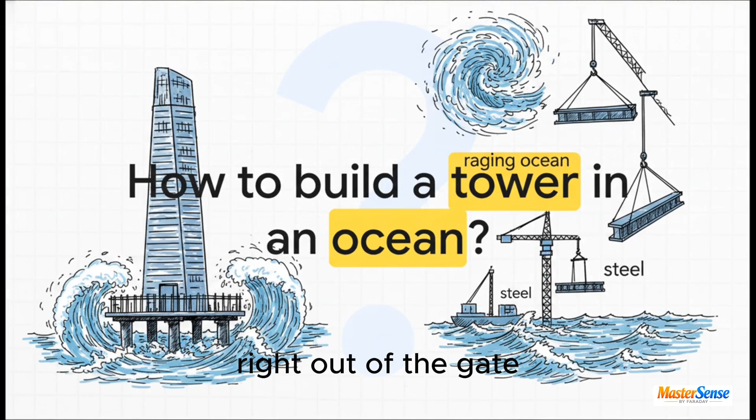Right out of the gate, it raises a really high-stakes question: how do you build a skyscraper in the middle of a raging ocean? Because that's exactly what we're talking about here. The ocean is an unpredictable, constantly moving environment, the ultimate antagonist. Ocean waves can exert thousands of tons of kinetic force per square meter. Engineers literally have to outsmart those raw physics just to safely deploy thousands of tons of steel.

Okay, let's dive into this mission briefing. We're taking a step-by-step journey today. First up, leaving the shore. Then, fixing the foundation. Third, installing the topsides. And finally, mastering those extreme marine risks.

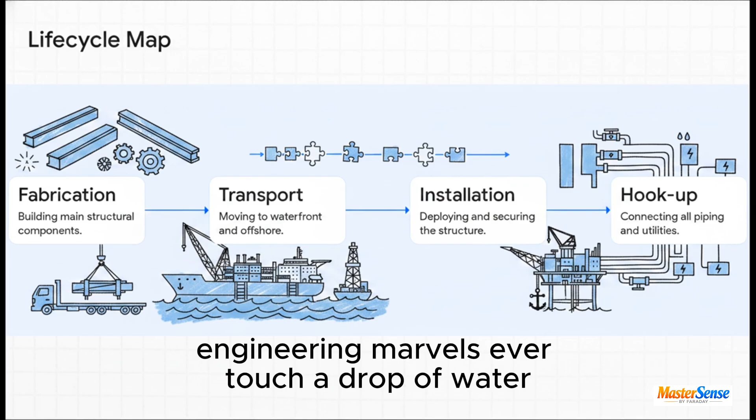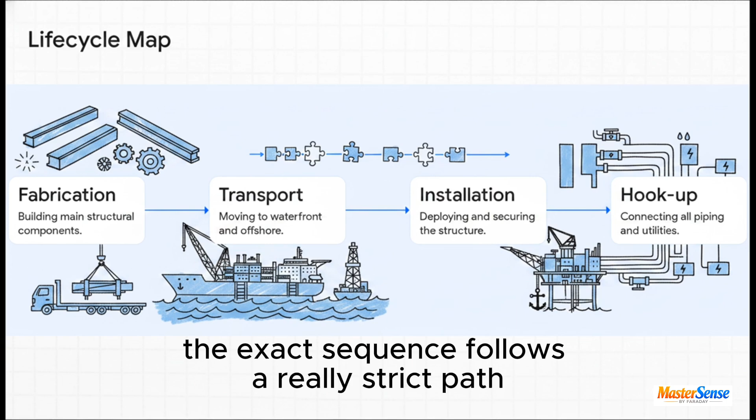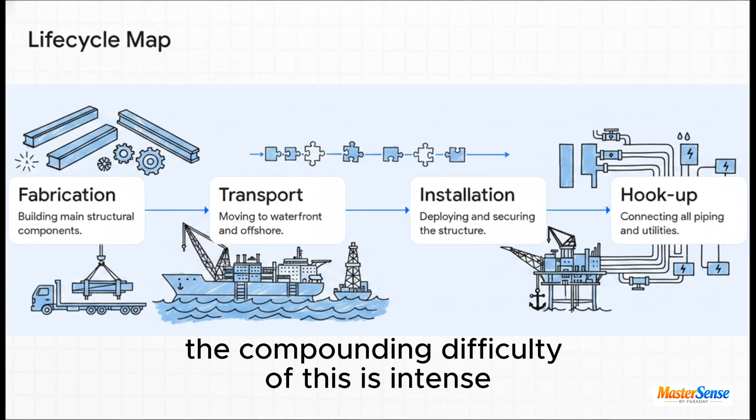Section 1, leaving the shore, the birth of a giant. Before any of these massive engineering marvels ever touch a drop of water, their operational life actually begins on dry land, safely inside these gigantic fabrication yards. The exact sequence follows a really strict path: fabrication, transport, installation, and finally hookup. That might sound like a pretty straightforward, simple progression, but actually the compounding difficulty of this is intense.

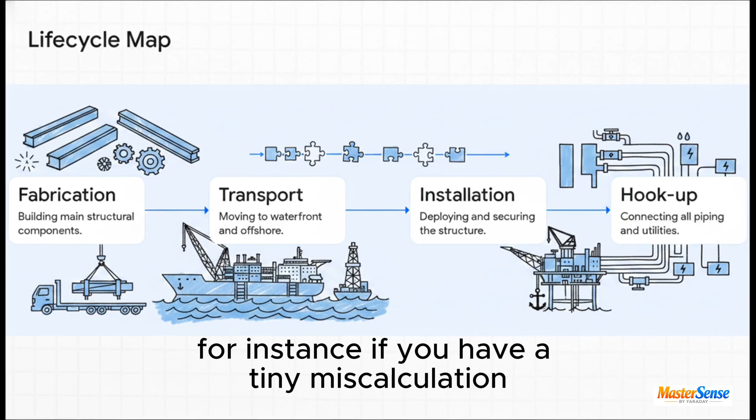It's a domino effect. Every single phase must be executed flawlessly before the next one can even start. For instance, if you have a tiny miscalculation or a delay during the transport phase, it doesn't just mean you arrive a little late. It throws off your meticulously planned marine vessel availability and can completely derail the offshore hookup phase. We're talking delays that cost millions of dollars a single day.

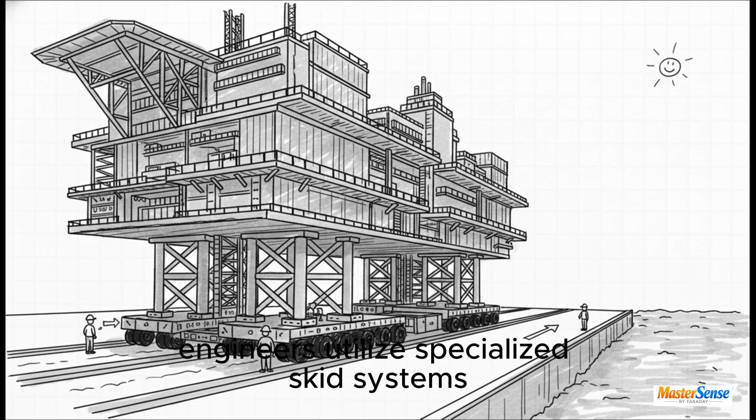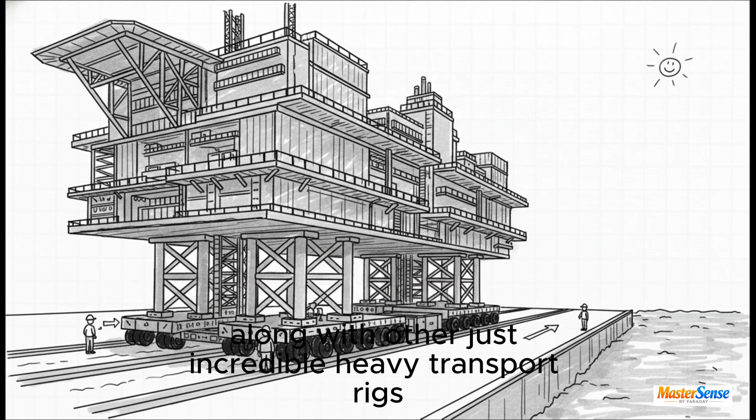Once the fabrication is wrapped up, we hit what's called the load-out operation. This is where we have to physically move thousands of tons of structural components right to the waterfront. To pull this off, engineers utilize specialized skid systems and these amazing self-propelled modular transporters, usually called SPMTs for short, along with other incredible heavy transport rigs, just to inch these giants down to the dock.

And when I say inch, I mean literally inching them. A single SPMT can feature hundreds of independently steerable wheels. They move at this painstakingly slow walking pace, and that's absolutely crucial to ensure the load remains perfectly level and stable over the uneven ground.

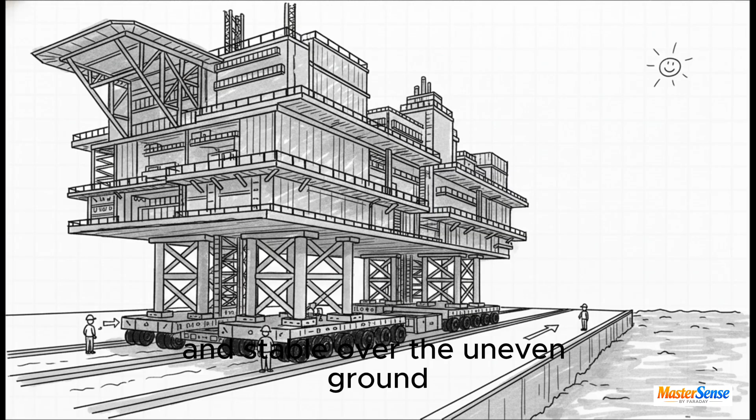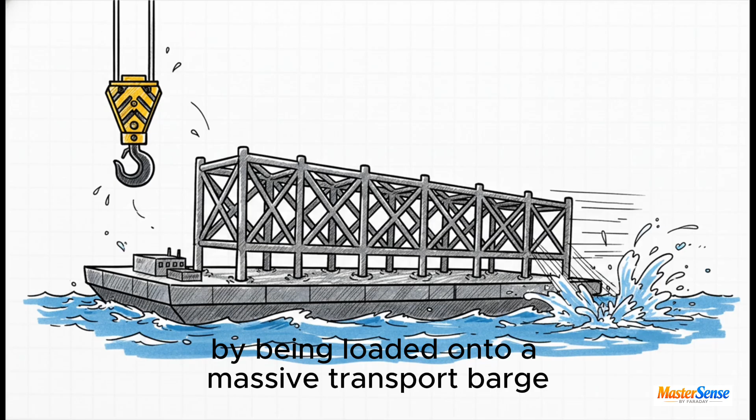Let's move on and see how this builds. The primary foundational base, which the industry calls the jacket, makes its journey by being loaded onto a massive transport barge. This right here is the moment the safety net of dry land is totally removed. Depending on the specific constraints of the project, the jacket waits on the barge for either a dramatic offshore launch, where it is practically slid right into the sea, or it undergoes a massive heavy lift.

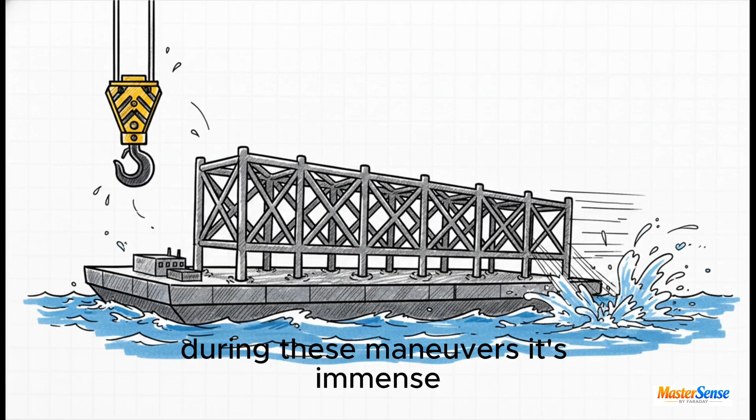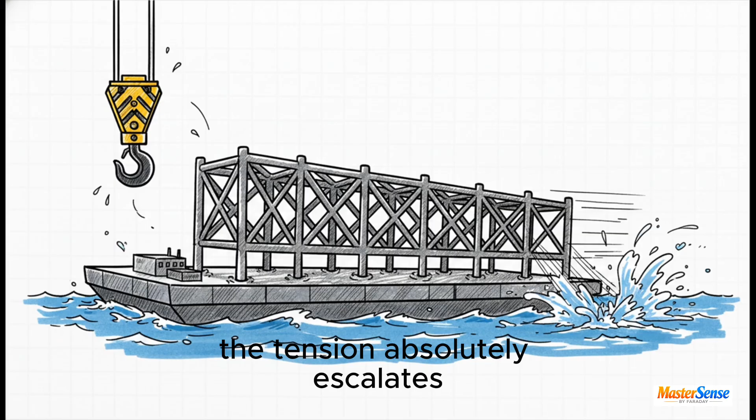The engineering stress placed on the jacket during these maneuvers is immense. The steel structure has to endure extreme bending moments and shear forces that it will actually never again experience once it's permanently installed. The tension absolutely escalates as this mammoth structure leaves land behind and heads out to the open ocean.

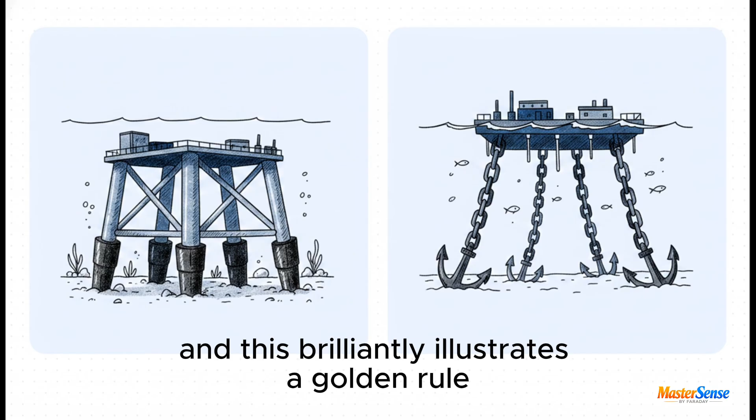Moving right along to Section 2, fixing the foundation, anchoring the beast. So we've officially arrived at the offshore installation site. And this brilliantly illustrates a golden rule in structural deployment: you simply cannot build upwards until your base is perfectly, permanently secured.

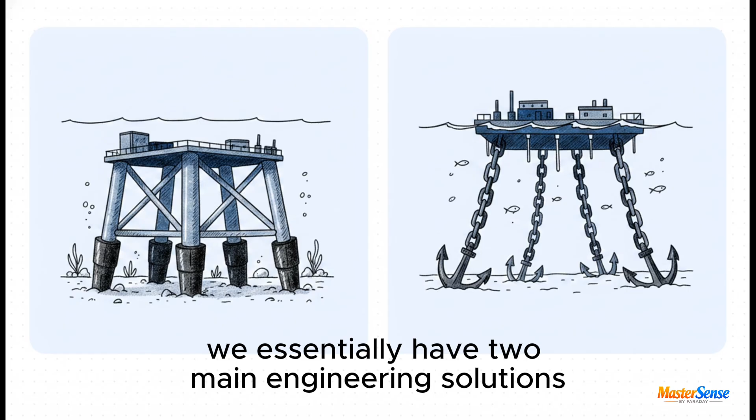We essentially have two main engineering solutions to hold these beasts in place against those relentless ocean currents. For fixed developments, you've got the jacket structure, which gets locked in by driving huge piles right through the jacket legs, deep down into the seabed, followed by grouting. But fixed jackets usually hit their economic and physical limits at a few hundred meters of water depth. Beyond that, the sheer amount of steel required just becomes way too massive.

That is where floating platforms come in. They rely instead on incredibly robust moorings and anchor arrangements to stay perfectly situated in ultra-deep waters. Now, if you're going with a floating development, there is a staggering amount of prep work hidden beneath the waves.

Floating platforms require the prior installation of moorings, anchors, flexible risers, and subsea tie-ins. All of this highly complex underwater infrastructure has to be perfectly situated and installed before the main facility even shows up at the site.

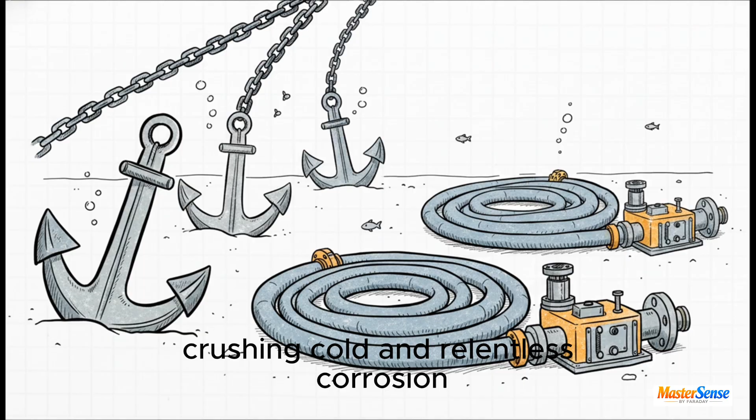And just think about the environment down there for a second. These flexible risers and tie-ins have to withstand immense deep water hydrostatic pressure, crushing cold, and relentless corrosion, all while maintaining perfect structural integrity for decades.

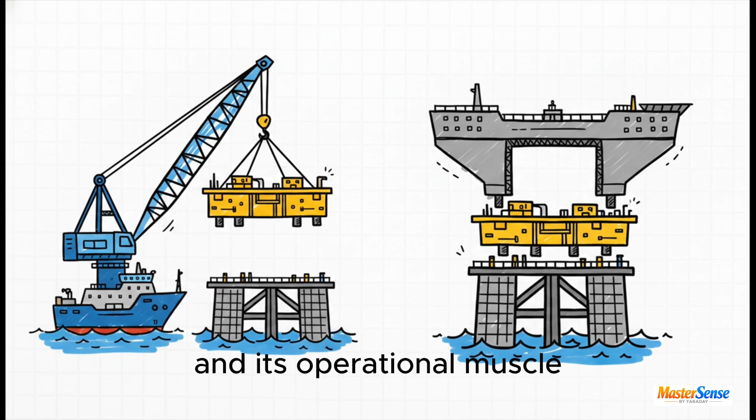It's a tall order. All right, Section 3, installing the topsides, the crowning achievement. This is where the facility actually gets its brains and its operational muscle. The topsides, which is the functional upper half of the facility housing all the processing equipment and the living quarters,

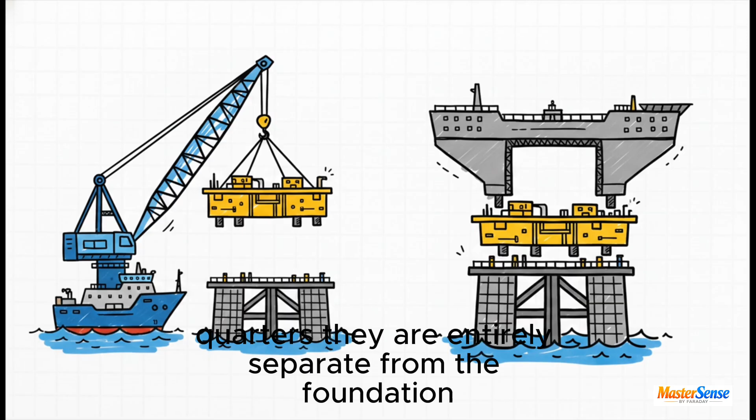they are entirely separate from the foundation and are transported out to the site on their own. Engineers literally have to take thousands of tons of incredibly delicate, complex equipment and essentially drop it onto a base sticking out of the moving water.

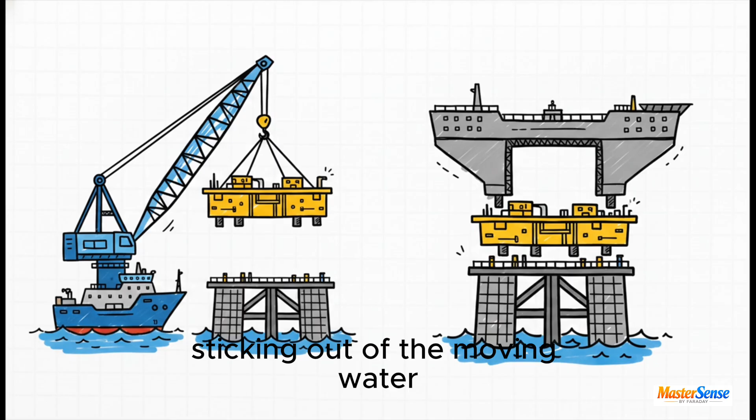Integrated topsides are placed either as massive single heavy lifts or through these highly calculated float-over methods. Just to put the scale of those single heavy lifts into perspective, we're talking about utilizing the largest crane vessels on the entire planet. They are capable of lifting the equivalent weight of 10,000 cars, basically hoisting the entire Eiffel Tower in a single lift. The precision required for that is just unbelievable.

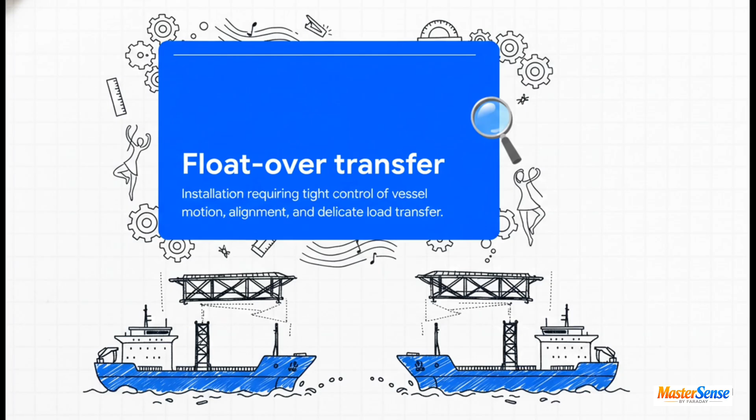Now, what's really interesting about this is when a single lift just is impossible. That's when engineers use a float-over transfer. This is a precise installation method that requires very tight control of vessel motion, incredibly strict alignment tolerances, and delicate load transfer. You are literally floating the giant topside over the foundation on a specialized vessel and then carefully mating the two parts together. Doing this with millimeter accuracy while everything is floating on moving water, honestly, it's like trying to thread a needle while riding a roller coaster.

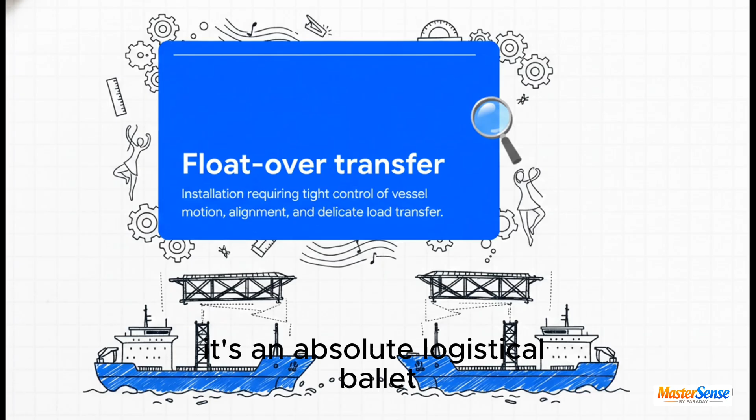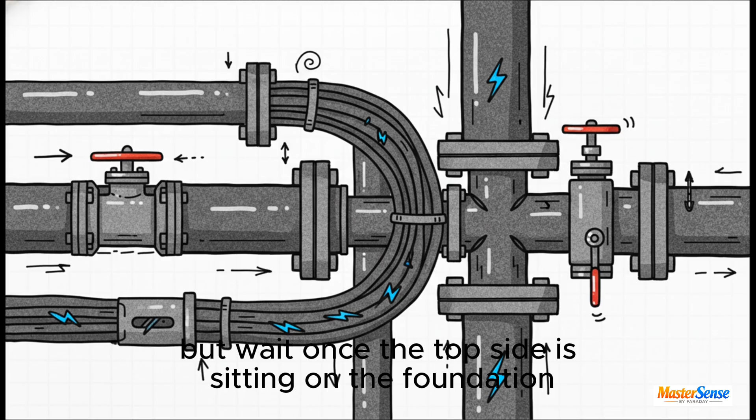It's an absolute logistical ballet, relying on perfectly timed ballast adjustments to slowly lower the topside right onto those foundation legs. But wait, once the topside is sitting on the foundation, the structure still isn't ready. We enter the offshore hookup phase.

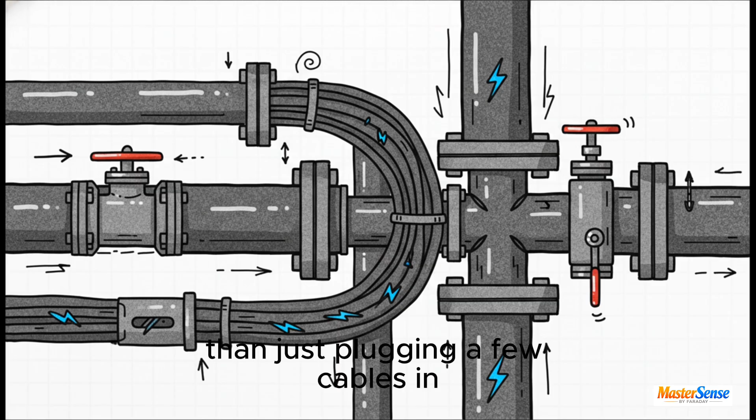This involves critical internal lifelines, piping, electrical cabling, risers, control lines, utility connections. You have specialized teams working offshore to connect all of these systems. And look, this is way more complex than just plugging a few cables in. The hazard level during this hookup is extreme.

You are meticulously integrating high-voltage electrical cabling right alongside highly pressurized resource piping, all within a hyper-corrosive salt air environment. Every single weld and connection point has to be perfectly sealed to bring this inert metal giant fully and safely to life.

Finally, Section 4, mastering extreme marine risks, battling the elements. The environmental pressures pushing against this entire operation are just immense, and the margin for error out there, it's absolutely zero. Let me read this direct quote from our source material because it really hits the nail on the head. Offshore installation is, quote, highly sensitive to vessel availability, metocean weather windows, and marine operational coordination, end quote.

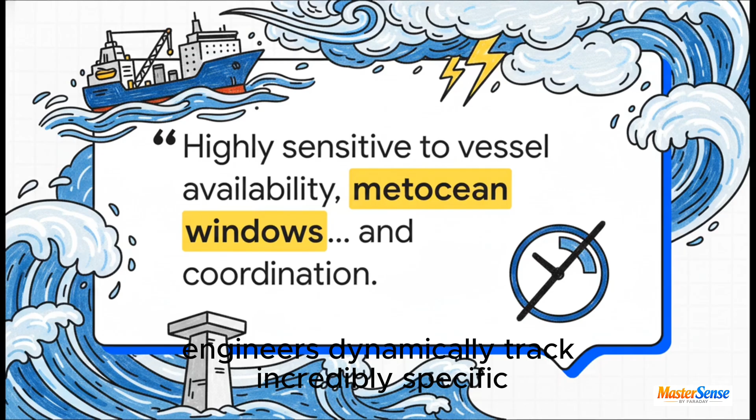Because the ocean completely dictates the schedule, engineers dynamically track incredibly specific metocean data. They're monitoring exact wave heights, wave periods, underwater current velocity, and complex wind shear profiles. It's not just about looking out for big storms. It's about finding the exact micro window where the ocean's kinetic energy drops low enough to allow a safe transfer. If you miss that window, well, the entire operation just pauses until the math lines up again.

To survive out there and prevent a total disaster, engineers have an overwhelming amount of real-time monitoring requirements that they have to juggle simultaneously. Throughout the entire installation phase, they are constantly tracking ballast control, managing temporary structural support, running marine spread analysis, and keeping up with constant stability tracking. And these aren't isolated metrics. They interact with each other constantly.

For example, during a structural transfer, temporary ballast control must actively and continuously counteract the immediate shifting weight of the topside in real time. If that ballast is off by just a fraction of a percent while the load transfers, boom, that structural imbalance could lead to a totally catastrophic failure. So, the crucial point is that the ultimate goal of all this planning is to maintain stability, manage risk, and ensure flawless installation accuracy under extreme pressure.

Mastering this intense logistical puzzle isn't just an engineering flex, right? It's practically a necessity for our modern world. It is the only way we're able to power vast electrical grids with deep water wind farms or extract vital global resources from previously inaccessible environments. The engineering, the coordination, the execution, it all has to be absolutely perfect to make that happen.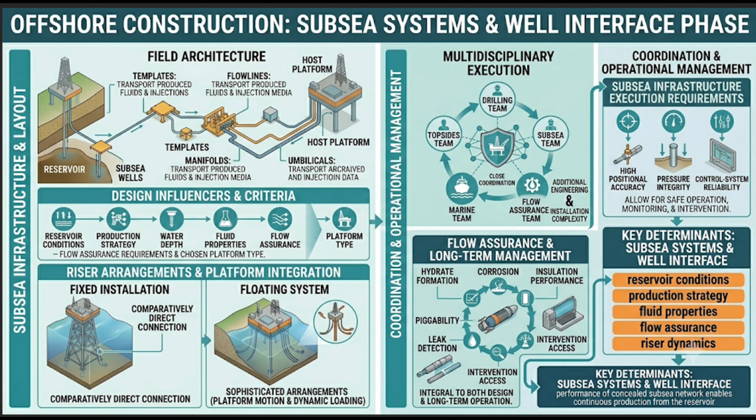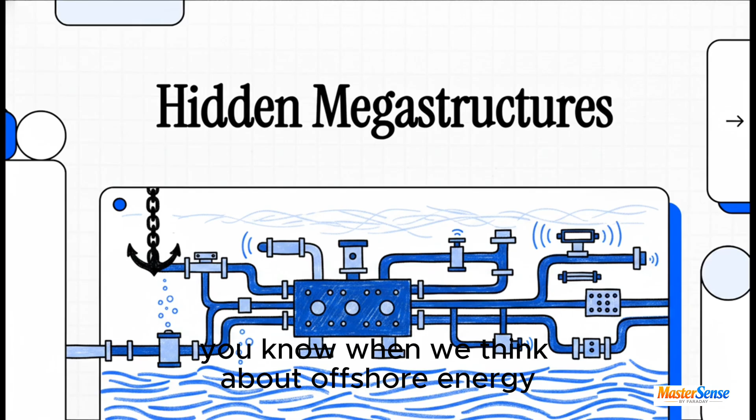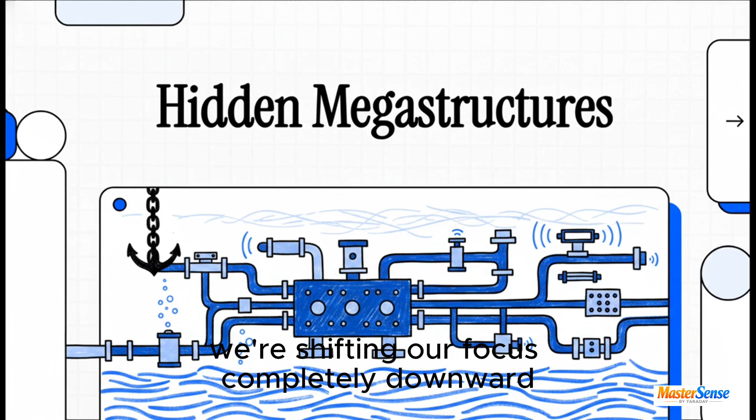Hey everyone, welcome to this explainer. When we think about offshore energy, we instantly picture those colossal, highly visible platforms towering hundreds of feet above the ocean waves. They're absolutely massive feats of human engineering. But today we're shifting our focus completely downward, straight into the abyss. We're going to examine the hyper-complex, utterly invisible subsea networks, often miles below the surface, that actually make those massive surface facilities possible in the first place. We're talking about thousands of tons of steel, robotics, and incredibly high-pressure architecture, all operating silently in the pitch black.

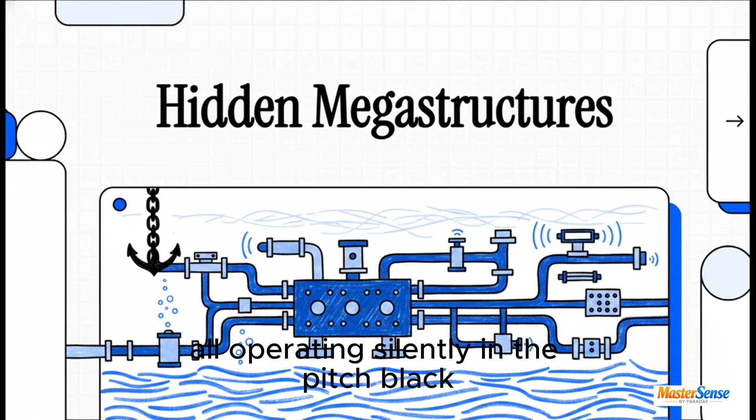So let's dive into this by asking a fundamental question: what is actually required to connect a reservoir of resources deep underground to a massive processing facility above the crashing waves? It's definitely not as simple as dropping a long pipe down to the ocean floor. We're talking about crossing a hostile threshold where temperatures hover near freezing and the water pressure alone is enough to crush a military submarine. Creating a safe, reliable conduit through that environment is one of the most demanding engineering challenges on the planet.

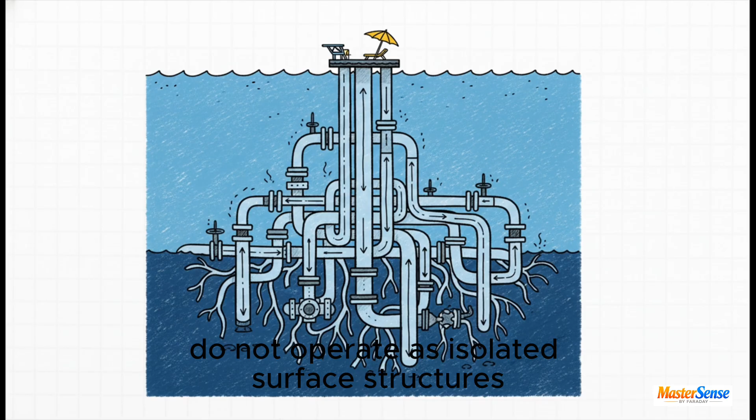Section 1: the visible versus the invisible. To truly understand offshore engineering, we have to recognize what's basically an iceberg effect. The crucial point here is that the massive rigs we see up top do not operate as isolated surface structures. They are completely dependent on a closely integrated subsea system.

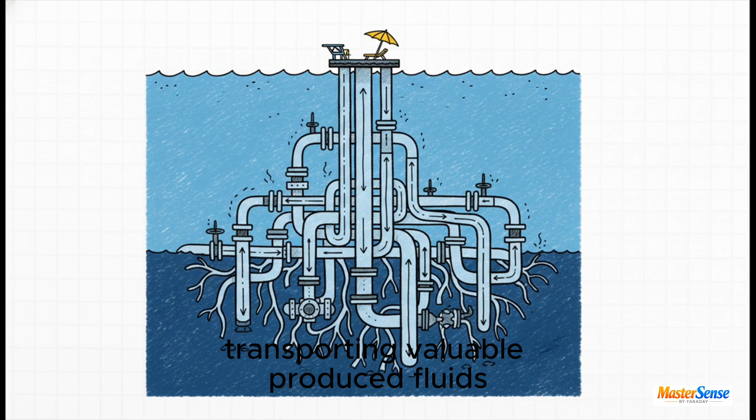This concealed network is doing all the heavy lifting, transporting valuable produced fluids like crude oil and natural gas up from those crushing depths. Simultaneously, it's pumping injection media, like highly pressurized water or gas, back down into the earth to maintain underground reservoir pressure. Without this invisible, hard-working foundation beneath the waves, that billion-dollar surface facility is essentially just a really expensive floating hotel.

Moving on to Section 2, the anatomy of subsea systems. The sheer volume of specialized infrastructure required to safely manage the flow between the seabed and the platform is breathtaking. We are looking at a hidden industrial city down there. It starts with the subsea wells and wellheads—think of those as the high-pressure faucets tapping directly into the reservoir. These are anchored into templates, which serve as the foundational footprints planted in the muddy seafloor.

Then we have manifolds—think of these as underwater traffic cops. They collect and combine the fluid flowing from multiple different wells into a single stream. Those fluids then travel through flow lines, which are basically the major horizontal highways running across the seabed.

Driving this entire system are the umbilicals—the vital life support cords running from the surface all the way to the seabed, providing the electrical power, hydraulic fluids, and chemical injections needed to keep the whole operation running. Finally, everything funnels into the risers, acting as the main vertical elevators, pushing the resources thousands of feet straight up to the platform.

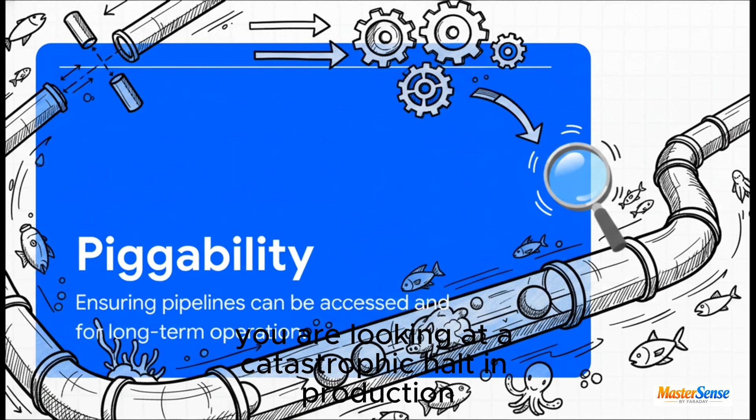Because if a blockage happens deep underwater and you haven't designed the system to be piggable, you're looking at a catastrophic halt in production and a massive multi-million-dollar repair bill. And you definitely can't just buy these components off a shelf at a hardware store.

The exact anatomy of this invisible city is completely dictated by intense environmental and economic pressures. Engineers have to meticulously design the interface based on the very specific underground reservoir conditions and the long-term production strategy. They have to account for the crushing water depth, the unique chemical properties of the fluid being extracted, strict flow assurance requirements, and the specific type of platform on the surface. And the margin for error here is practically zero—you really can't easily fix a miscalculation when it's sitting under 10,000 feet of freezing salt water.

All right, Section 3: fixed versus floating platforms. The difference between these two systems is stark, and the type of surface facility chosen radically changes the underwater engineering required. With fixed installations, the massive legs of the platform are anchored directly into the seabed. Because the structure itself doesn't move, the connection between the seabed and the platform can be comparatively direct and rigid.

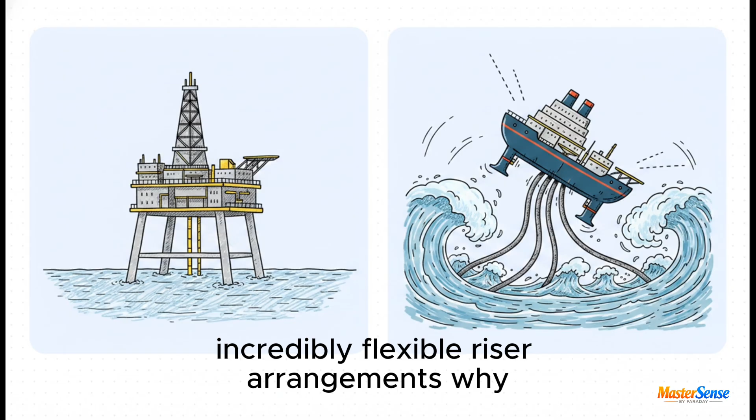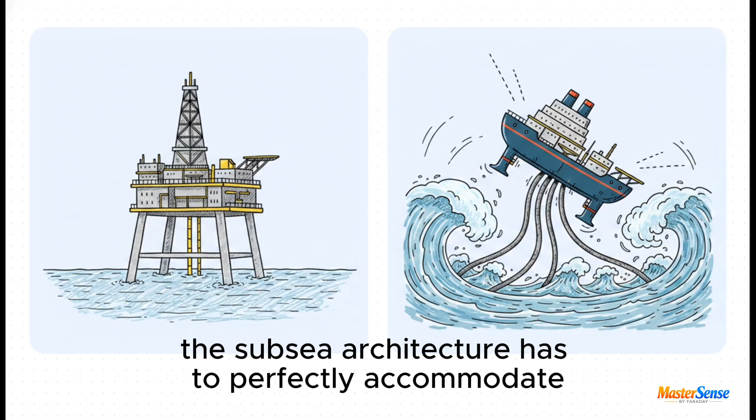But floating systems are a completely different beast. They require highly sophisticated, incredibly flexible riser arrangements, because these systems must constantly battle the dynamic loading and shifting motions of the ocean above. The subsea architecture has to perfectly accommodate a surface facility that is heavily pitching, rolling, and heaving with hurricane-force waves, all without snapping those vital connections to the seafloor. Which brings us to Section 4, the complex execution puzzle.

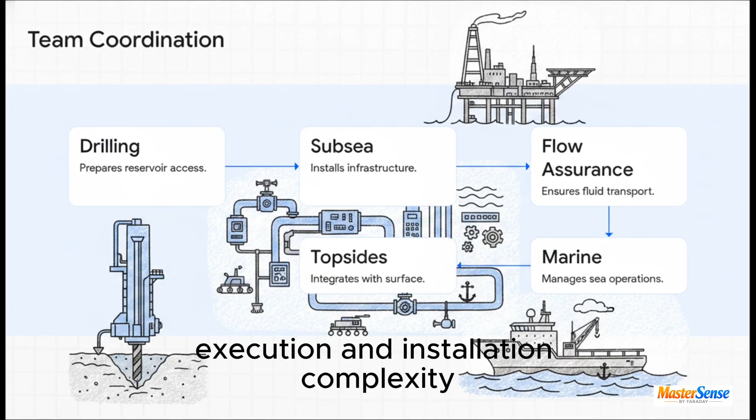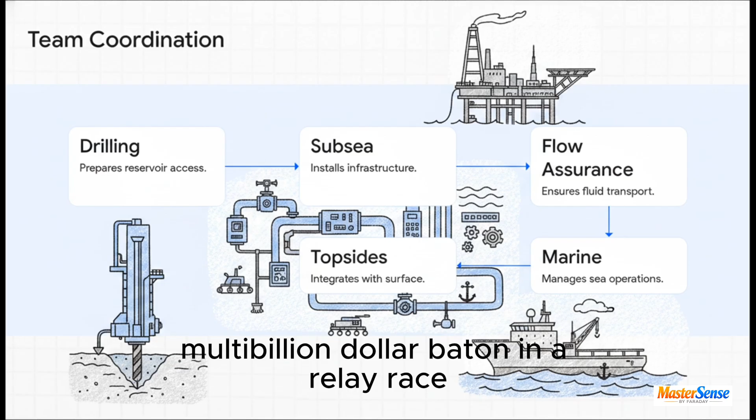Actually, physically building this dynamic underwater architecture introduces immense execution and installation complexity. It requires extreme, tightly sequenced coordination across multiple specialized departments. Imagine handing off a highly volatile, multi-billion-dollar baton in a relay race.

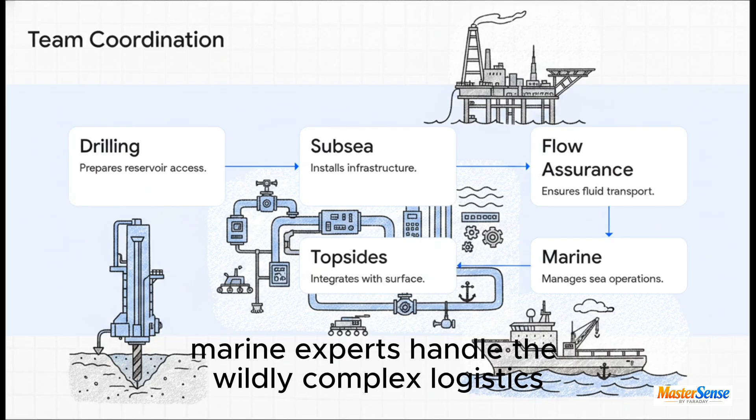The drilling team goes in first to create the physical access to the reservoir. They hand off to the subsea team, who installs the foundational infrastructure and massive robotic valves. Then the flow assurance team steps in to ensure the chemical properties of the fluids will actually allow them to move through those freezing pipes. Marine experts handle the wildly complex logistics of deploying this gear from ships pitching out in the ocean. And finally, the topsides team integrates the whole shebang seamlessly with the surface facility.

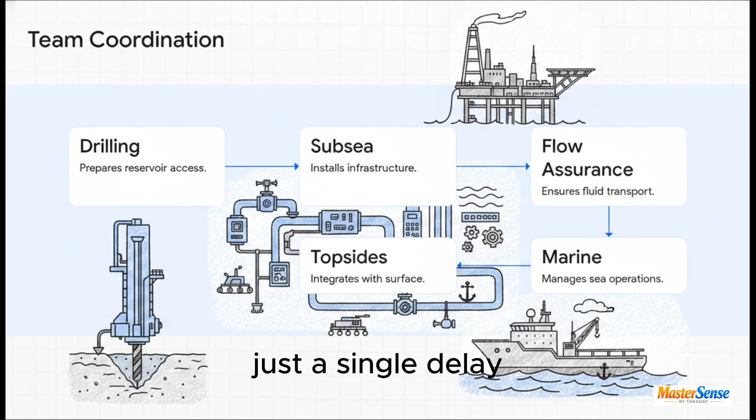Just a single delay or miscalculation by any one of these teams compromises the entire architecture.

This massive, coordinated effort is entirely focused on a set of absolutely vital installation imperatives. Chief among them is mind-bending positional accuracy. Imagine dropping a 1,000-ton piece of steel equipment through a mile of pitch-black, fast-moving ocean currents and needing it to land flawlessly on a target the size of a dining table.

That is what they do. Once installed, they must maintain absolute pressure integrity and control system reliability in a totally unforgiving environment. And simultaneously, the interface must allow for safe, continuous host platform monitoring while ensuring we leave a viable pathway for future interventions.

And finally, Section 5, long-term operation challenges. Getting the equipment installed is a monumental feat, for sure, but surviving the depths is an ongoing battle that lasts for the entire 20 or 30-year lifespan of the well.

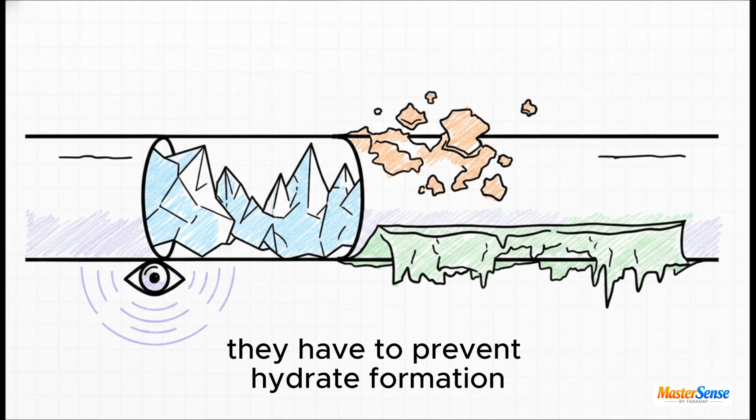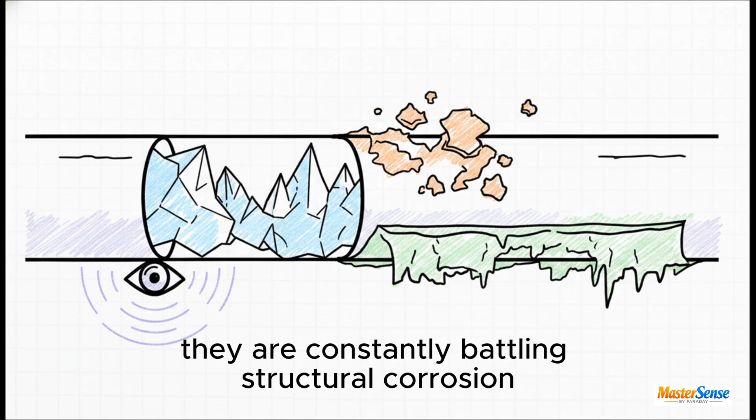Engineers are in a relentless, day-to-day fight against extreme operational hazards. They have to prevent hydrate formation, which are basically solid, ice-like plugs that can violently form inside the pipes due to the freezing temperatures and high pressure. They are constantly battling structural corrosion from the highly reactive seawater, monitoring the degradation of thermal insulation, and ensuring leak detection systems are perfectly calibrated.

And overarching all of this is the harsh reality of intervention access limitations. You can't exactly send a mechanic down 2 miles in a submarine to tighten a loose wrench. Everything has to be heavily automated, totally over-engineered for reliability, or specifically accessible by highly specialized remote-operated vehicles.

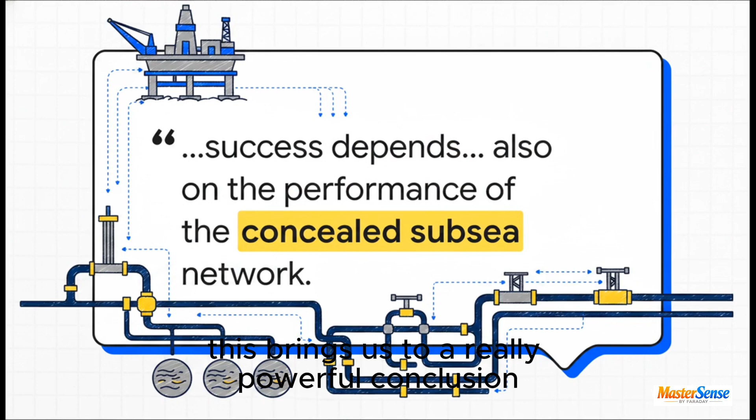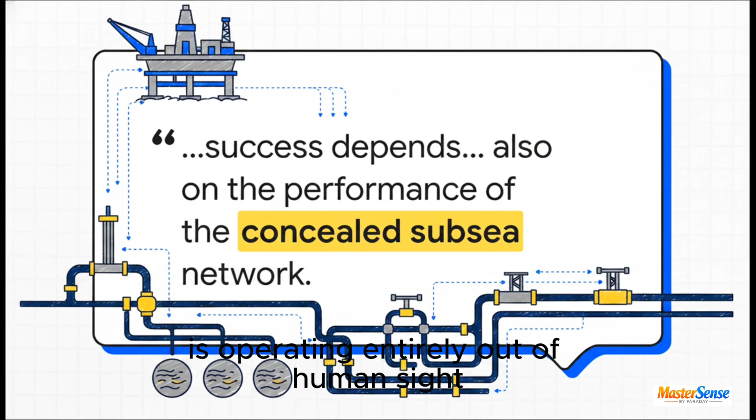This brings us to a really powerful conclusion from our source material. Quote: 'The success of an offshore platform development depends not only on the integrity of the visible surface facility, but also on the performance of the concealed subsea network that enables continuous production from the reservoir.' This perfectly captures the reality of our deep dive today, revealing that the true, awe-inspiring marvel of these megastructures is operating entirely out of human sight.

So I want to leave you with this final thought. Next time you see a picture or a video of a towering offshore platform standing defiantly amidst the crashing waves, will you only look at the surface, or will you picture the sprawling, highly dynamic, multi-billion-dollar industrial network operating silently in the freezing abyss miles below?

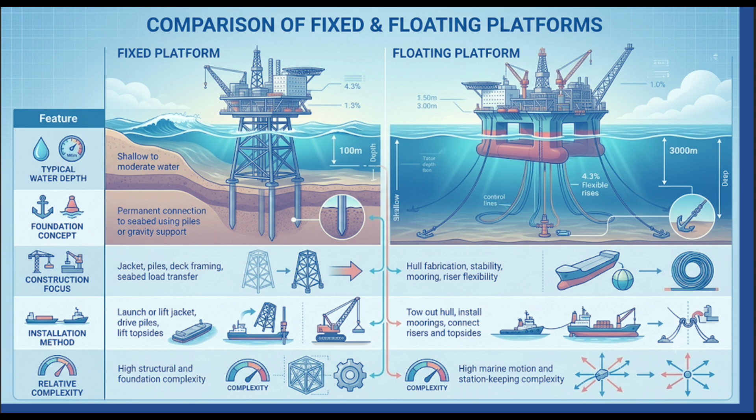Welcome back, everyone, to another explainer. Today, we're setting the stage for a massive engineering showdown. We're heading out into the open water to explore two completely different, absolutely incredible philosophies for building giant structures in some of the harshest, most unforgiving environments on Earth. It's going to be a wild ride.

So right off the bat, here's the core mystery we really need to solve together today: how on earth do you build on the ocean floor? Just think about the sheer physical power of the ocean for a second. You're dealing with crushing pressures, sudden, violent storms, corrosive saltwater, and incredibly unpredictable currents. Trying to build anything permanent out there, it is literally the ultimate engineering problem.

Okay, let's dive into this. To actually survive these physical extremes, engineers have historically developed two fundamentally different approaches. Philosophy 1 is all about brute strength, the strategy to just stand firm using fixed platforms. Philosophy 2 takes a totally different, much more adaptable approach: the strategy to ride the waves using floating platforms.

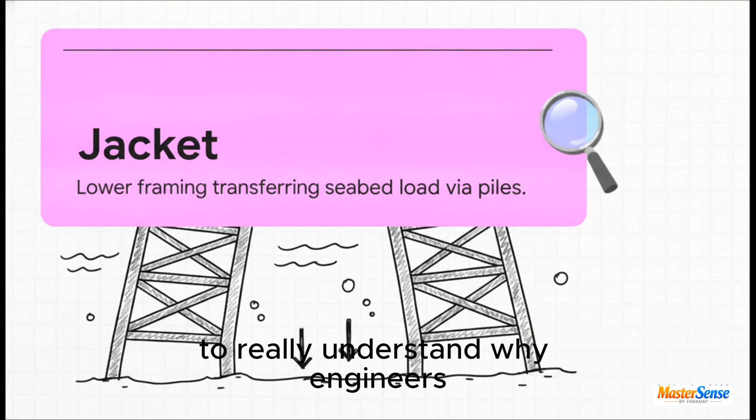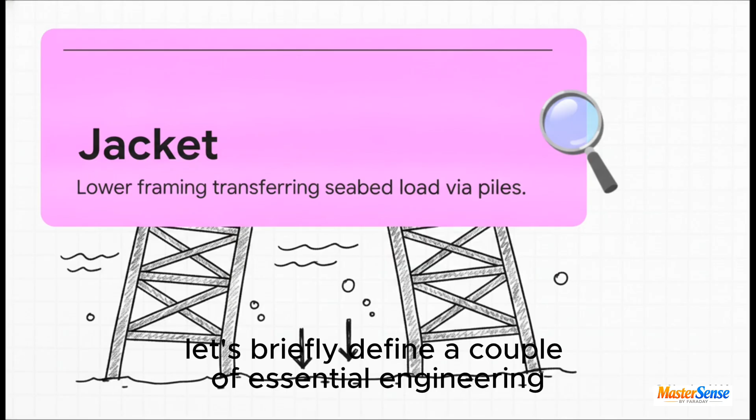Section 1: Conquering the ocean depths. To really understand why engineers choose one philosophy over the other, our journey today is going to be a spatial one. We'll start near the safety of the shore and travel progressively out into the unpredictable deep ocean. But before we start building, let's briefly define a couple of essential engineering terms so you can clearly visualize the anatomy of these giant platforms.

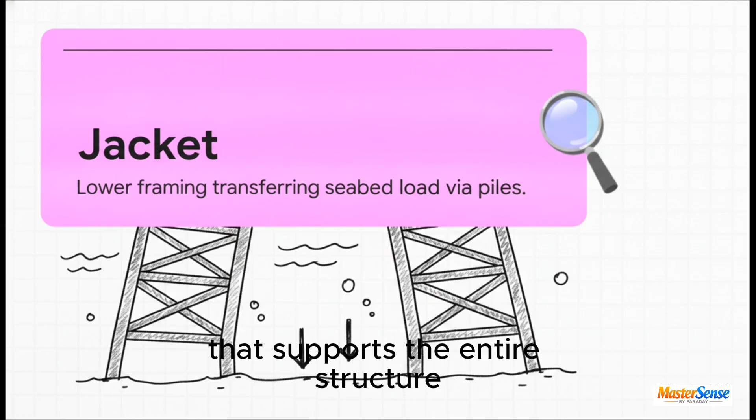First, we have the jacket. The jacket is the lower framing that supports the entire structure. Think of it as the heavy steel legs of the platform.

Then we have the topsides. These are the upper decks where the actual human operations take place, housing the equipment, the crew quarters, and all the active machinery. Keep these two distinct parts in mind as we move forward.

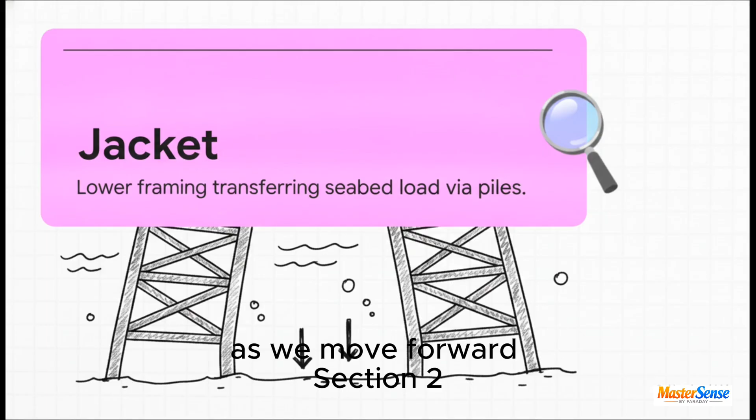Section 2: Standing firm, fixed platforms. This is our very first stop on this spatial journey, where the environment is defined by shallow to moderate water depth. Because the water isn't insanely deep here, engineers have one massive advantage: they can actually physically reach the bottom. And because they can easily reach the seabed, they can rely on a strategy of absolute permanence. To achieve that permanence, these platforms literally fight the ocean.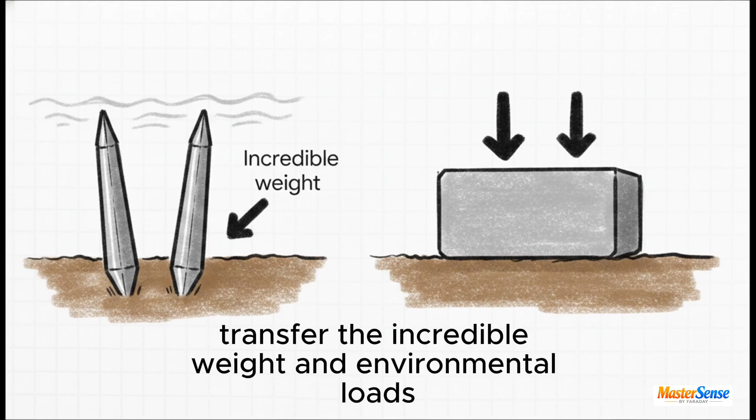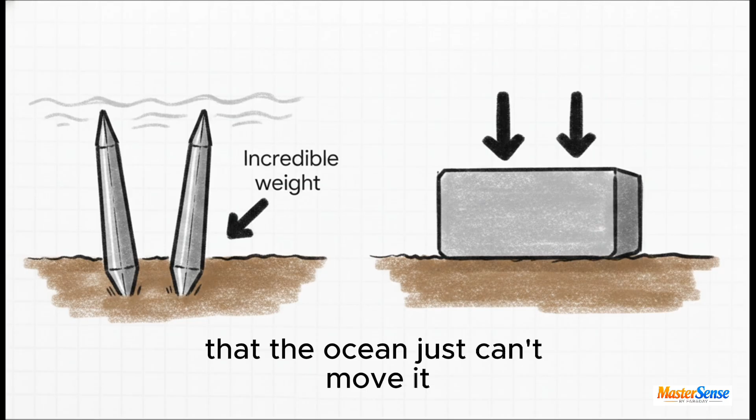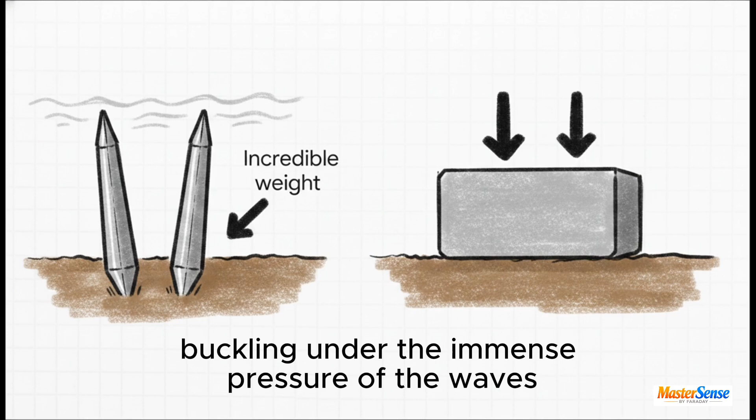The foundation concept requires a permanent connection to the seabed. Engineers transfer the incredible weight and environmental loads directly into the ocean floor using massive, deep-driven piles, or by using sheer, overwhelming gravity support. They literally make the base so incredibly heavy that the ocean just can't move it. Because of this, the construction focus is all about building incredibly robust deck framing and ensuring that the seabed load transfer happens without the whole structure buckling under the immense pressure of the waves.

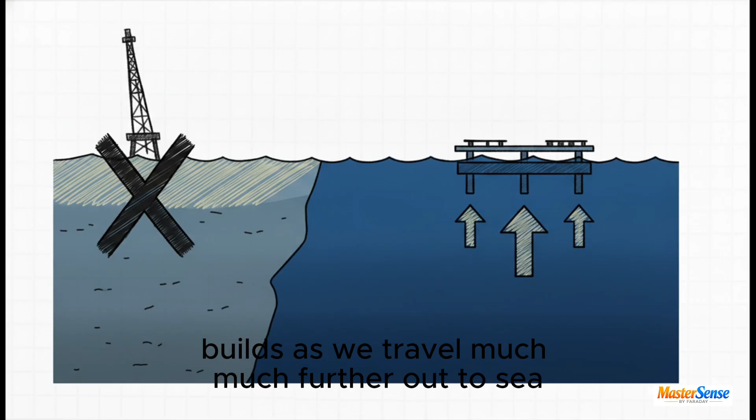Section 3: Riding waves, floating platforms. Let's move out and see how this builds as we travel much further out to sea, to a place where touching the ocean floor is simply no longer a viable option. Now we're entering deep to ultra-deep water. The depths here are, frankly, impossible to bridge with a traditional steel jacket. It would just be too much metal, way too much weight, and frankly, too much cost. So this specific environmental problem forces a radical, buoyant shift in exactly how we engineer our presence on the water.

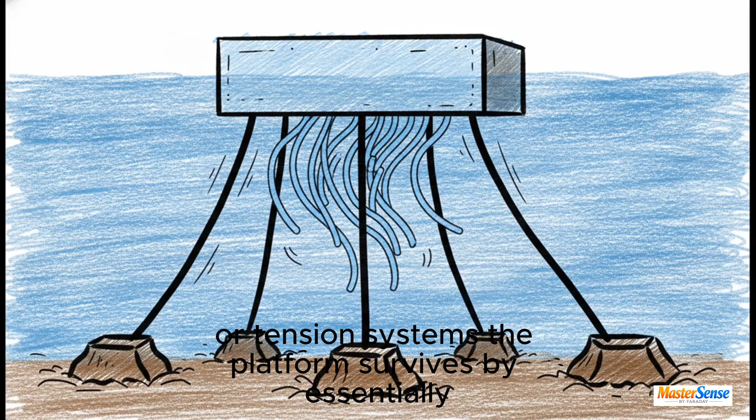Instead of rigid strength, we look to fluid dynamics. The foundation concept completely changes to a buoyant hull that's held in place by complex moorings or tension systems. The platform survives by essentially dancing with the marine motion, rather than resisting it entirely. Naturally, the construction focus shifts dramatically as well. It becomes all about hull fabrication, maintaining absolute stability, and calculating these intensely complex mooring configurations.

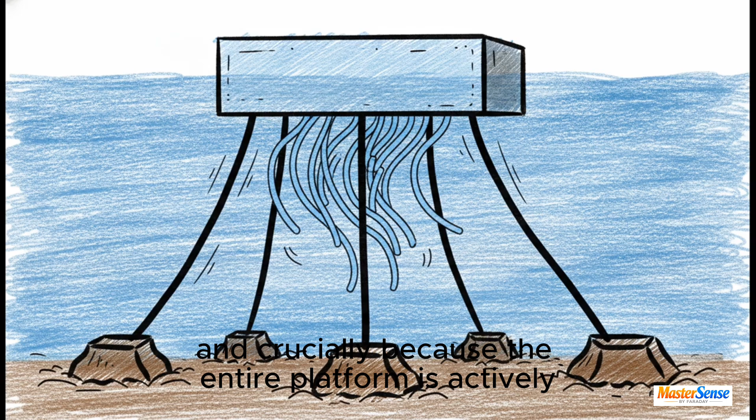And crucially, because the entire platform is actively moving with the waves, engineers require extreme riser flexibility. That means the pipes connecting the topsides to the ocean floor below must be able to bend and flex constantly without snapping. It's wild to think about.

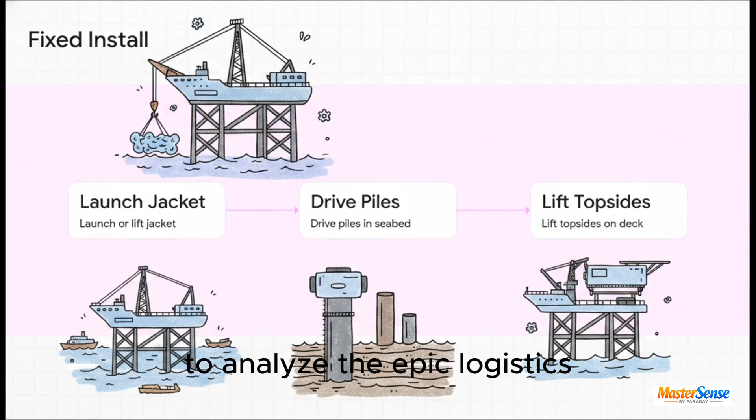Section 4: The engineering trade-offs. Now we're bringing both of these philosophies together to analyze the epic logistics and the ultimate trade-offs of building in these extremes. Let's look at the installation methods. Installing a fixed platform is basically a massive, heavy-duty logistical ballet.

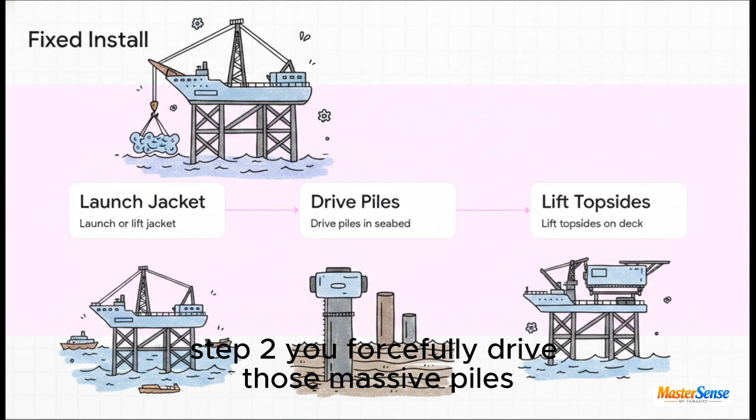Step 1: you bring the colossal steel jacket out and launch or lift it right down into the water. Step 2: you forcefully drive those massive piles deep into the seabed with giant hydraulic hammers. And Step 3: you bring in these massive crane vessels to carefully lift the heavy topsides perfectly onto the waiting jacket. It's entirely about grounded, stationary heavy lifting.

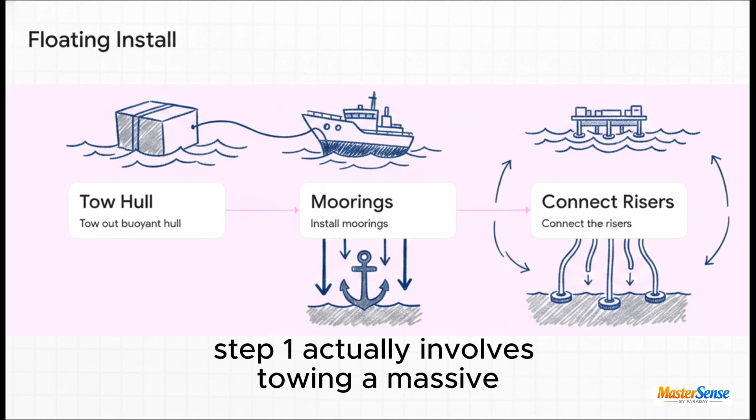Now, what's really interesting here is the total contrast in the logistics. Gone is the heavy, bottom-up building. For a floating platform, Step 1 actually involves towing a massive, prefabricated floating hull out into the open ocean. It's a truly epic scale of transport. Step 2 is installing the extensive moorings into the seabed to keep it from drifting away.

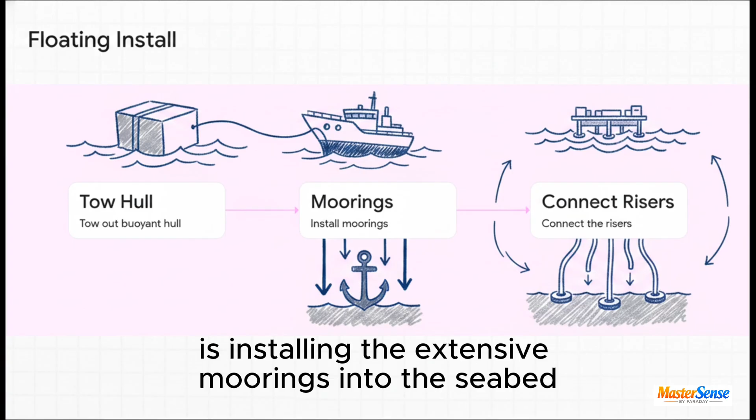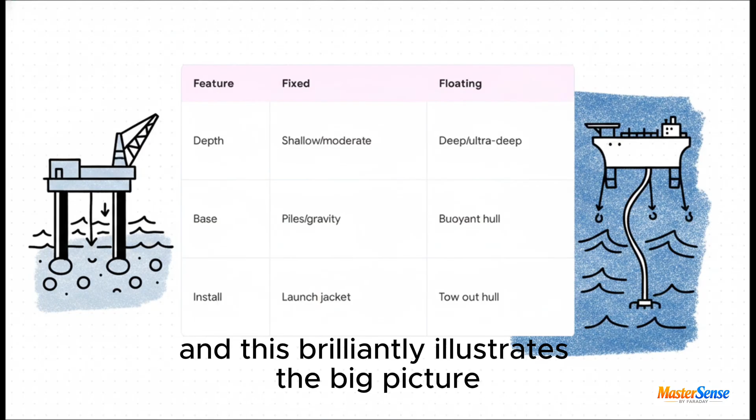And Step 3 is carefully connecting those highly flexible risers and topsides while the entire structure is literally actively bobbing in the deep ocean. And this brilliantly illustrates the big picture. Here's your ultimate cheat sheet synthesizing our entire journey today. You can clearly trace the divergence directly from the data.

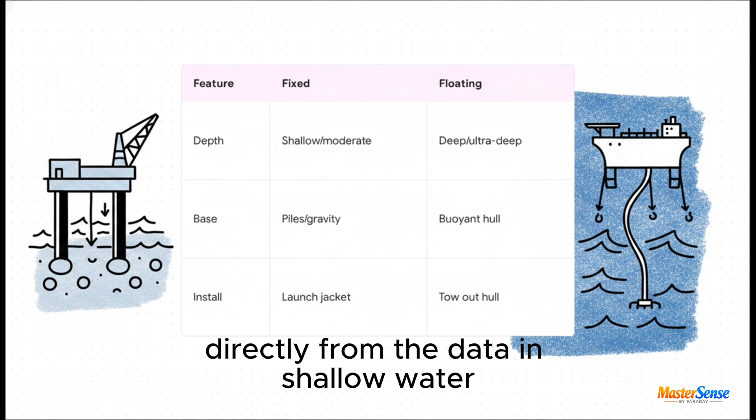In shallow water, you use permanent piles. You focus on seabed load transfer and you build upward. But in ultra-deep water, you rely on buoyant hulls, you focus heavily on stability and riser flexibility, and you build by towing and mooring.

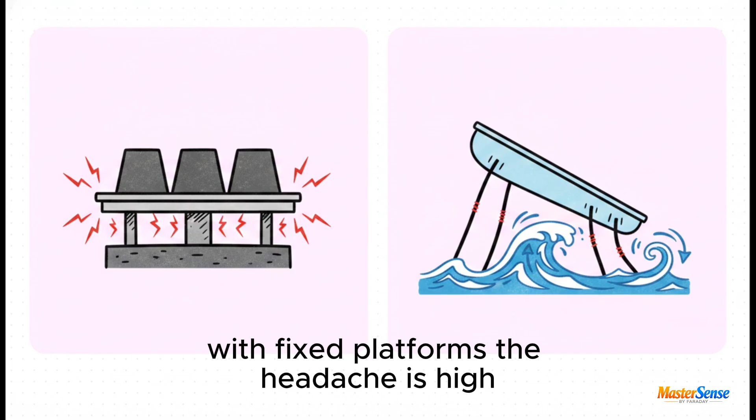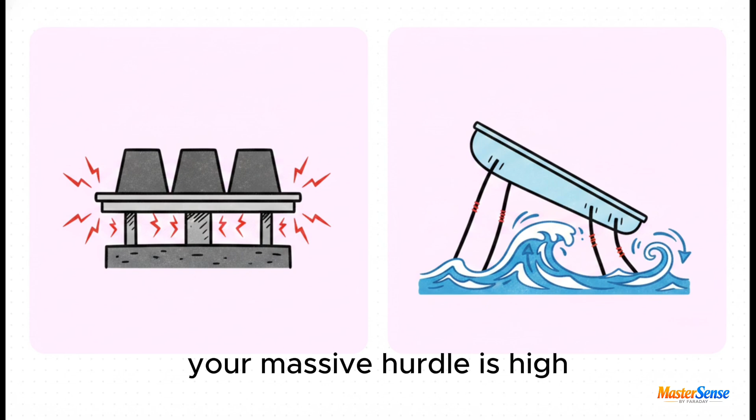So the crucial point is really about where you, as an engineer, choose to take on your complexity. With fixed platforms, the headache is high structural and foundation complexity. It's all about making sure the steel holds up against immense stationary stress. But with floating platforms, your massive hurdle is high marine motion and station-keeping complexity. You are constantly battling to keep a floating city relatively still in a chaotic, absolutely restless environment.

Which leaves us with a pretty profound thought about humanity's ongoing battle with the sea. Is it harder to permanently grip the seabed and fight the ocean's force head-on, or to master the marine motion of a buoyant hull floating dynamically in ultra-deep water? Think about that trade-off the next time you look out at the horizon.

The ocean demands respect, and as we've seen today, engineering a way to survive it requires absolute brilliance, no matter which philosophy you choose. Thanks so much for joining me for this explainer. See you next time.